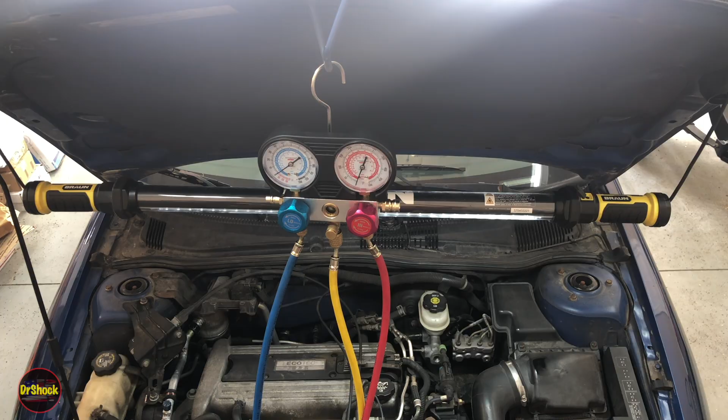All right guys, in today's video we're going to be working on this 2004 Chevrolet Cavalier again. It's got an AC performance problem. The AC system is working, but we're not getting the kind of cooling out of it that we would expect. The owner is complaining that it's not as cold as it was in the previous summer season. We repaired a leak on this previously on the AC compressor hose, the primary hose, and I'll put a link to that up here. But now that the leaks are fixed and it's holding the proper refrigerant charge, it's still not where it needs to be. So what are we going to do in this video?

I'm going to show you how to use a gauge set and some simple tests to determine where in the system we're getting this failure in performance.

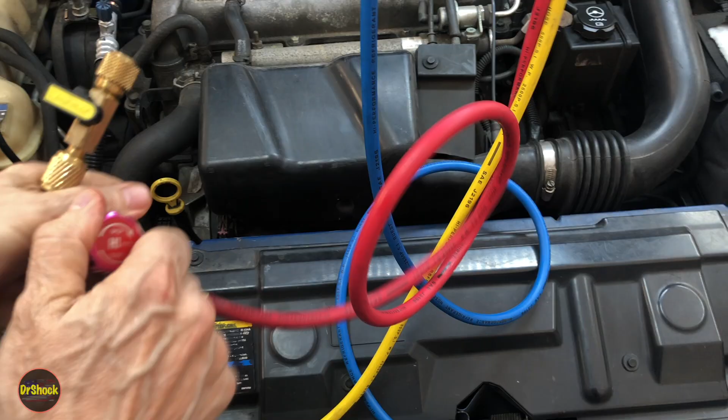So the first thing we're going to be doing is making sure that the gauge set valves that control the service valve couplers are closed, making sure the manifold valves are closed, and we're going to take the charge hose and hook it up to a vacuum pump.

The reason we're doing this is we've got to take the moisture out of these lines before we hook them up to the actual vehicle system. As we open this up, it'll suck all the air out of this hose and this hose. We want to do that because we don't want any atmospheric contamination getting into the system when we use this.

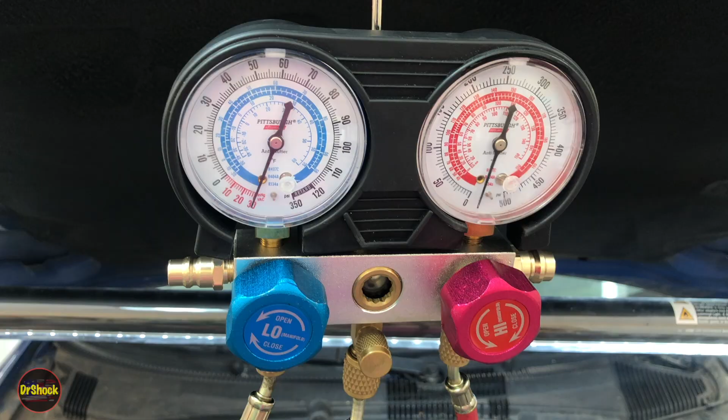So at this point, this hose is under a vacuum. We can disconnect it from the vacuum pump, as long as you've got a valve on the end of your charge hose, and as long as we keep this closed up, we've got this vacuum. So now what we can do is set these up on the actual vehicle.

So on this particular vehicle with this blue cap, this is the low side coupler. We're not going to open them just yet, we're just going to get them in position.

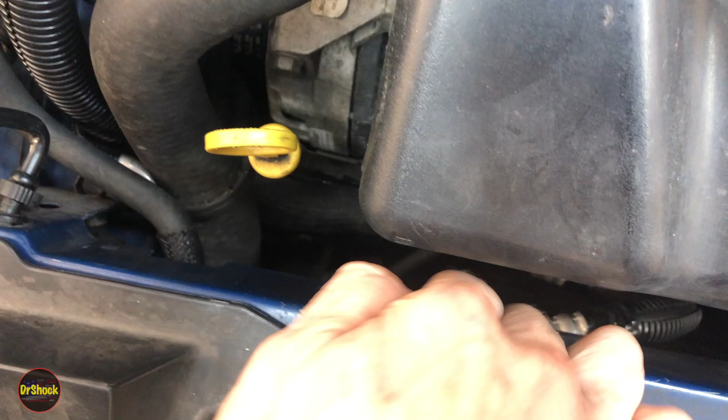Now this vehicle coverage applies to 2002 to 2005 Chevrolet Cavalier and Pontiac Sunfire. It's really hard to see, so let me get the camera in another position here, but the high side valve is actually under this metal cross member. All right guys, this is a better view hopefully.

So you see here's the red cap for that high side connector. I'm going to block your view just getting the cap off. There's no way I'm going to show contorting around to get the coupler on there, but that's the service fitting you've got to get the coupler onto.

All right, so we've got that on there. It's a real pain to get on there, particularly if the engine's been driven like this one where this is all hot under here, but it can be done, and that's what has to be done.

All right guys, from the inside we're going to start the engine up, put the AC on, put the fan on. We're going to leave it with the center vents because I want to concentrate the airflow up here, and then we're going to insert a thermometer in the left center vent.

Right now you can see the reading looks like just a little bit above 80 degrees. We're going to give it a couple of minutes, and then we're going to go under the hood and open up the service valves for the gauges.

All right, again with these two valves remaining closed, we're going to come down here and open up these valves, starting with the low side first. Just 2 or 3 fingers, you don't want to crank down on it. As soon as you get some resistance, you're done.

All right, so we're reading just under 50. I'm going to go reach my hand under the front here and do the same thing with this high side valve, and you guys can watch up there.

So we're reading what looks like around 49 on the low side, and maybe around 175 on the high side, maybe around 170. We're just going to let this stabilize for about 5 minutes, and then we're going to come back and record these two values.

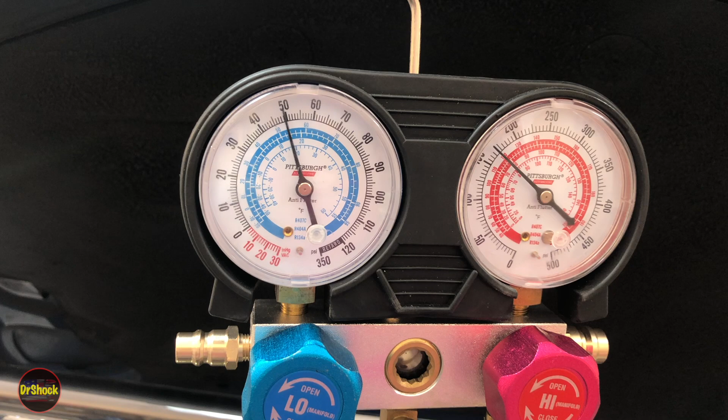Alright guys, it's been 5 minutes, and what we can see here on the PSI portion of the gauge, we're sitting just right at 50 PSI. So this is really too high for the low side. And then on the high side, using the PSI portion of the ring on the gauge, we are sitting just shy of 175, so I would probably call it 170.

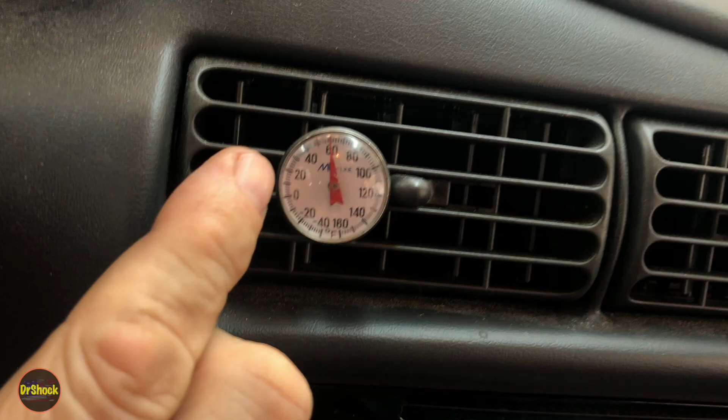So now we're going to go inside the vehicle and check the temperature we had inside. On the inside, we're reading what looks like 60 degrees, at best 59. Let's give it the benefit of the doubt and say it's 59. So we're going to write that number down here.

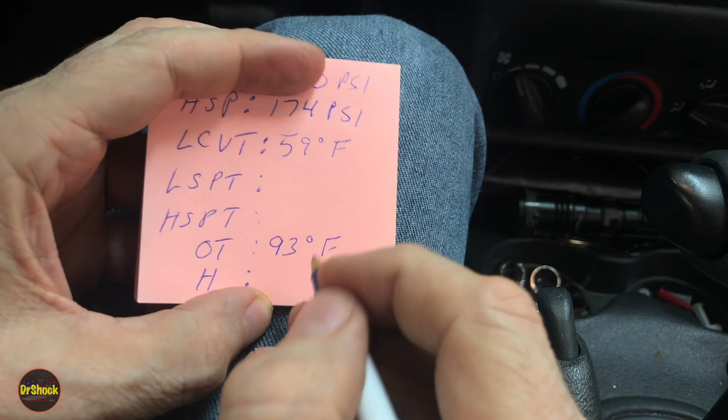So if we take a look at what we're writing down, we've got 59 degrees on the left center vent temperature. Our low side pressure was 50 psi. Our high side pressure was 174 psi. Some other things we can write down: the outside temperature currently is 93 degrees Fahrenheit, so these are all Fahrenheit measurements. And the outside humidity right now is 52%.

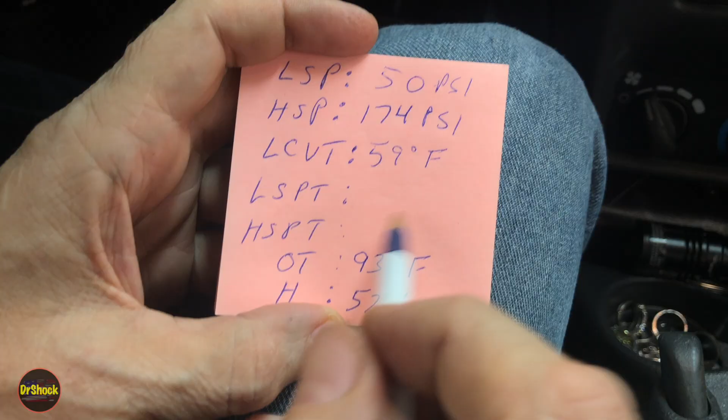We're going to need all of this information. We've got two more pieces of information we need to go get under the hood: the low side pipe temperature and the high side pipe temperature. This is a subjective measurement with your hand. So what we're going to do is shut everything down, feel those pipes, and determine if they feel hot, warm, cool, or cold, and jot down what that is. We're going to feed all of this into a service manual troubleshooting procedure. At this point, we're going to shut everything down, and within a minute or so, we want to go in and complete this next step.

So let's go back under the hood. All right, let's look at the gauges first. As we walk back in with the engine shut off, the pressures are going to start to equalize between the low and the high side. So we see the low creeping up, and we see the high coming down. So we want to see that happen, so that's a good thing. Eventually we should be reading about the same.

So now we're going to make this subjective measurement on the low side pipe. If I grab this pipe, it definitely feels cool, somewhere between cool and cold. It's obviously not too cold to touch, so I'm going to call that cool. And on the high side pipe, I'm just going to reach under here. This is usually hot, so be careful when you reach under here, and this is no exception. This pipe is definitely hot.

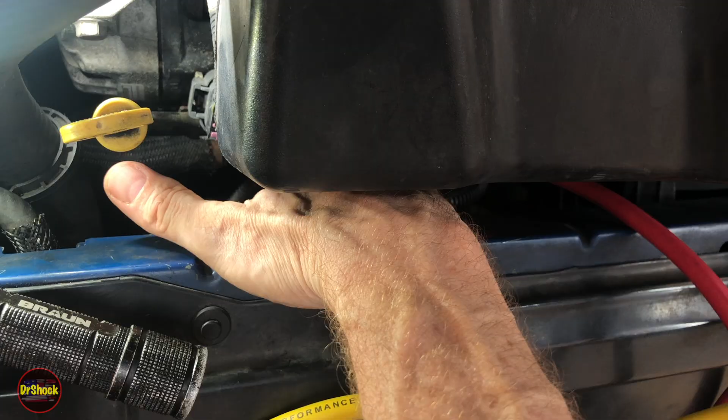All right, so at this point, all we want to see is does this eventually equalize? And I think it has. We're reading about 79 psi on the low side. These are roughly in 5 psi ticks, so 95, 90, 85. They're very close, so I'd say we're reading 85 psi on the high side and about 79-ish or so on the low side. So I think this is going to equalize if we give it more time.

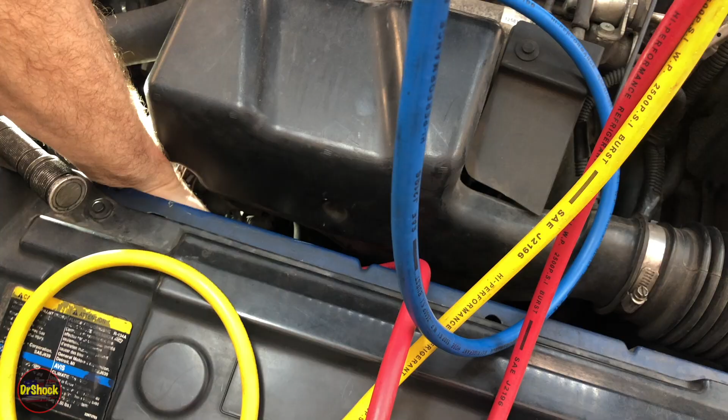So the next thing we're going to do is close off the high side service port down here. I won't be able to show you that because of the cramped corners, but you guys know what we're talking about. We're going to close this off, and hopefully we can get this with one hand here. We're going to remove this pipe, this coupler.

All right, so with that closed, this line is holding pressure. We're going to go ahead and open this valve to let that pressure into the manifold. We've got a lot more refrigerant sitting in this high side from what we did in our testing. We're going to start the engine back up, and we're going to suck some of this out into the low side before we go to the service manual.

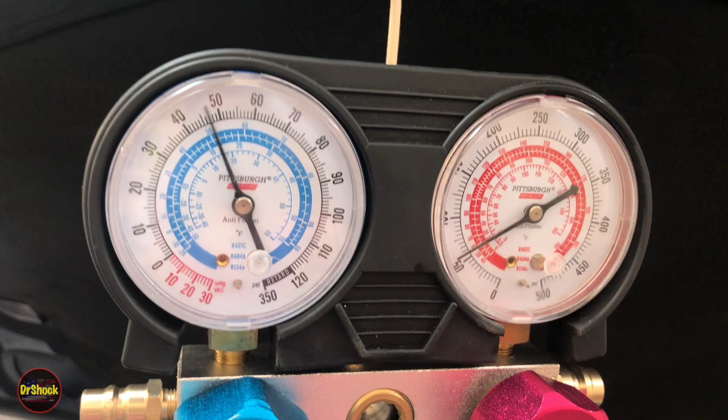All right, with the engine started again, our low side is going to slowly creep back up. We've left this the way we had it, so it's still open. All we're going to do is slowly open this valve to try to suck some of this pressure out. You see that's going down. Open that up all the way, and then we can close it.

Now we're done. All right, and with the engine shut off again, we can reclose the low side service port, remove it from the vehicle line. Let's go ahead and take a look at the service manual.

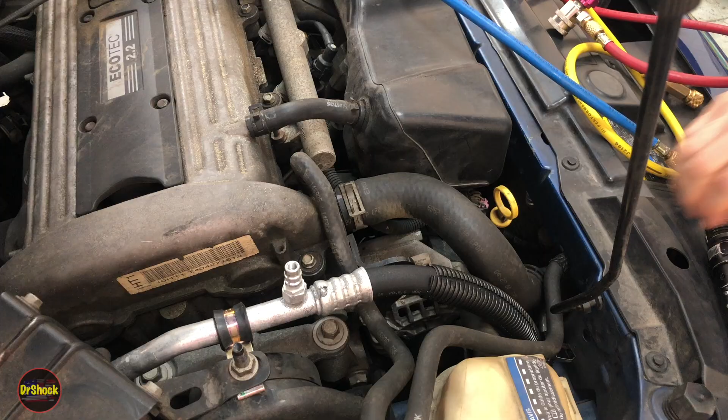All right guys, I'm just letting out the residual refrigerant that's trapped in the line from that exercise we did before, so that we're all back to zero and can stow this, because we're not going to need it for the next step. We're going to use a different machine.

Taking a look at the service manual, going over to this section, they're going to talk about the system performance test. We've done this, but I'll show you these steps. They have a dedicated machine that plugs in and does the temperature and pressure analysis, but we've done this with separate aftermarket tools.

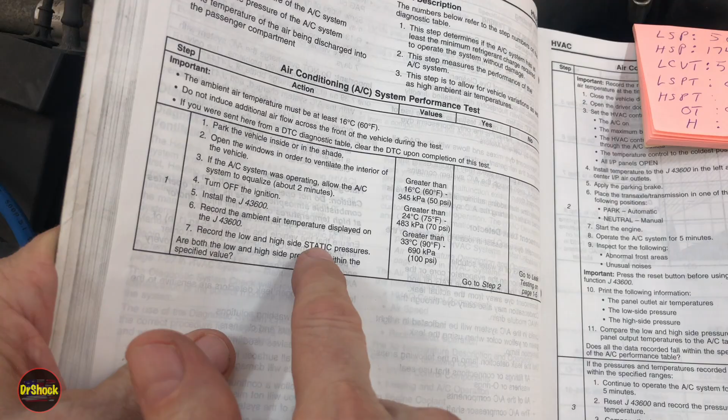They basically tell you to capture the ambient air temperature, which we did, and record the high and low side pressure. They're talking about the static pressure, without the engine running, but we went straight to the next step with the engine running. Then they ask you to look at what you're getting, and if it's not matching the values, they tell you to go to the next step.

The next step is to get the AC turned on, temperature set to the coldest position, blowing through the front vents, install the temperature sensor into the center IP outlets, then start the engine and operate it for 5 minutes. That's what we've done.

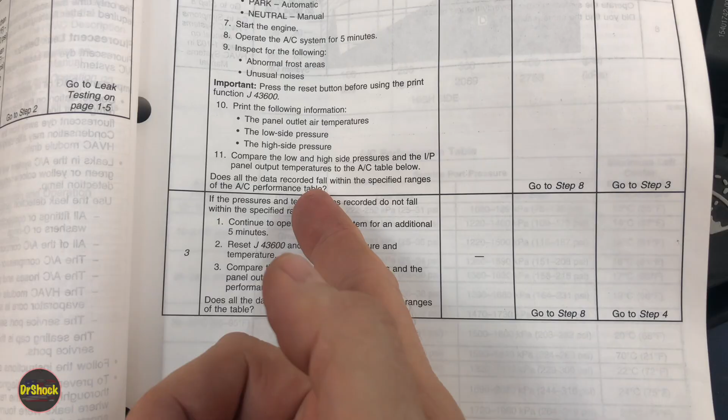They ask if it fell in the ranges specified in the performance table—I'll show you that in a minute. In our case, it's no. They tell you to run it again, reset the temperatures, compare it again, and if it still fails, go into diagnostics, which has a bunch of different tables. I'm going to show you a shortcut straight to this performance table.

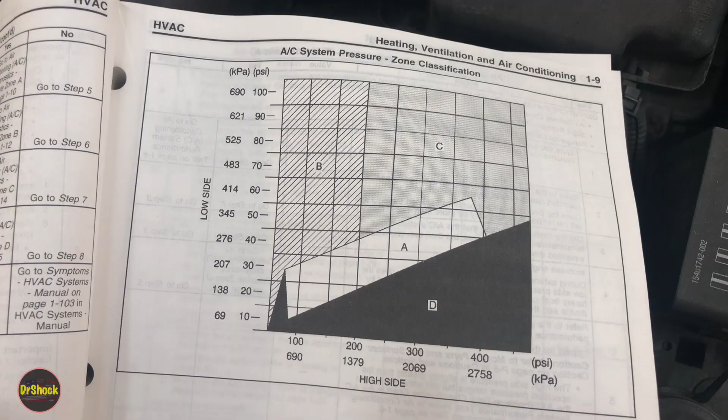Every GM vehicle has something like this in the service manual, but it's not always the same. For this particular vehicle, our outside temperature was 93 degrees and our humidity was 52%. We come down at the ambient air temperature, find 93 degrees Fahrenheit—that's this row—greater than 30% relative humidity—that's this row. We should be reading between 30 and 41 psi on this vehicle.

This video data is only for the vehicle in the video title and description. Our high side should be 203 to 282. So we're definitely reading too high here and too low there.

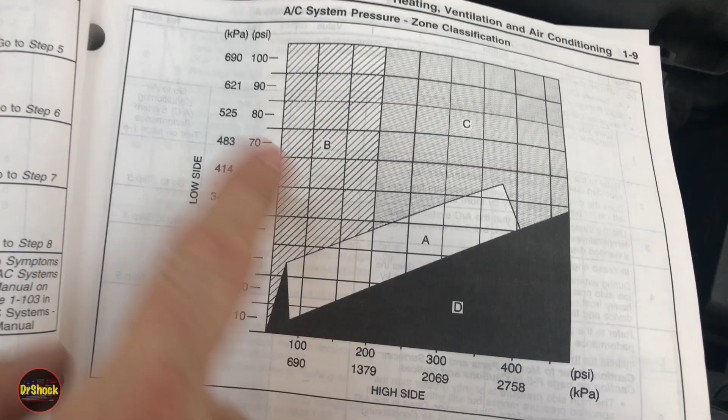Where that puts us on the diagnostic table is that all these different temperatures correspond to letter codes that tell you where the diagnosis is. If the low side is about 50 psi and the high side is about 174, that puts us squarely in this B zone.

If we take a look at the B zone diagnostics—this is A, this is B—it asks, were you sent here from the performance test? Yes.

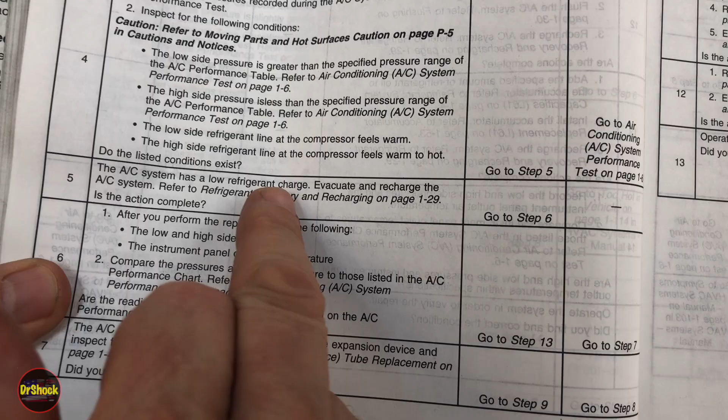Now I'm going to show you two different ways for this, because we did another video I talked about. It asks, did the pressures equalize or become static? I showed you that they do. So they'd tell you to go to step 5, which says the most common cause for that is a low refrigerant charge—they want you to evacuate, recharge the system, and check for leaks.

We already did that as part of the previous video. We'd go straight down to step 6, which says to read these pressures, take the air temperature, and compare that to the performance chart. If it's still not in compliance, go straight to step 7 and replace the AC compressor.

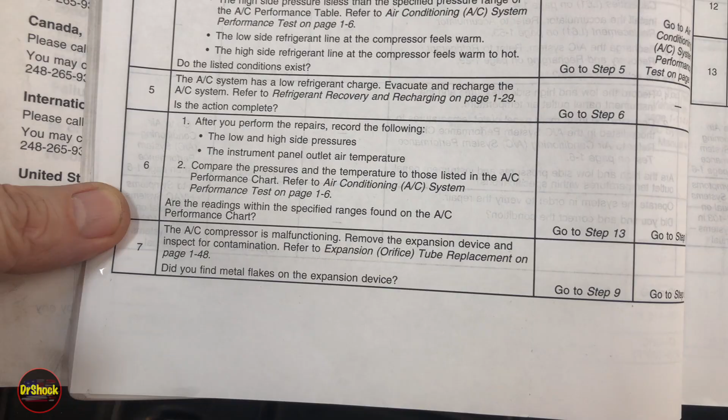As part of that, they want you to look at the orifice tube first, and then there's a number of steps because you may have to replace the orifice tube as well. With GM, it's not an automatic parts cannon where you just replace everything—you only replace the part that's failed, and you do tests to determine if other parts need to be replaced with it.

Let's say we didn't have that previous repair and we went through it and did this recharge—that would have caused us to go down this other leg of the tree on step 3. I'm just showing you both flavors of it.

They would say, is the low side pressure equal to or greater than the range in the table? In our case, it's greater. Is the high side less than what's in the table? In our case, it is.

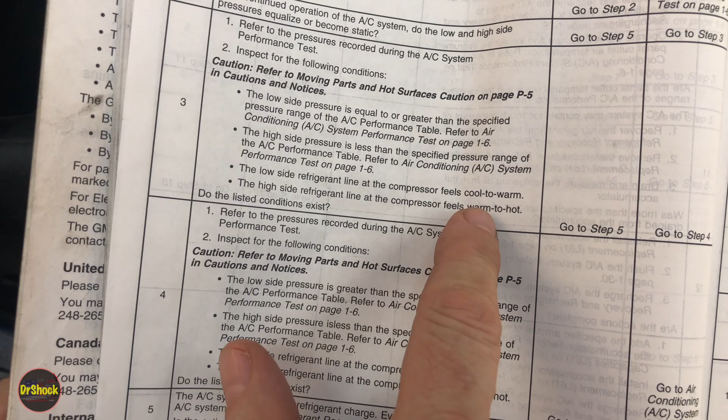Then, how does it feel—is the low side cool to warm, and is the high side warm to hot? In our case, we said yes to all of these, and it would again suspect a refrigerant charge problem, taking us down to step 5 again. So we'd end up again on this path that puts us down to the compressor.

So no matter how you answer that first question, you get to it's a compressor problem, given that we have these pressures, as long as we've eliminated the refrigerant as a cause, and we have in this particular vehicle's case. All right, so if we continue on, it wants you to remove the orifice tube, and they want you to start doing some questions.

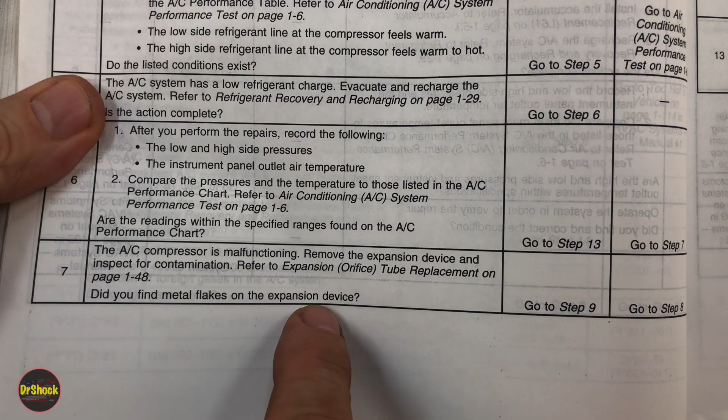They're going to say, did you see some metal flakes on the orifice tube? When they say expansion device, they mean orifice tube here, as you see up there. And if you said no, then they would take you to the next step, and they would say, do you see any brown powdery residue? And if you said yes, they would say, well then you need to flush the system out before you replace the compressor, and then also replace the accumulator. If you said no, then they would jump you down here and say, all right, you don't need to flush the system and you don't need to replace the accumulator, just replace the compressor. So depending on what that orifice tube looks like is going to dictate whether our repair is just the compressor or more than the compressor.

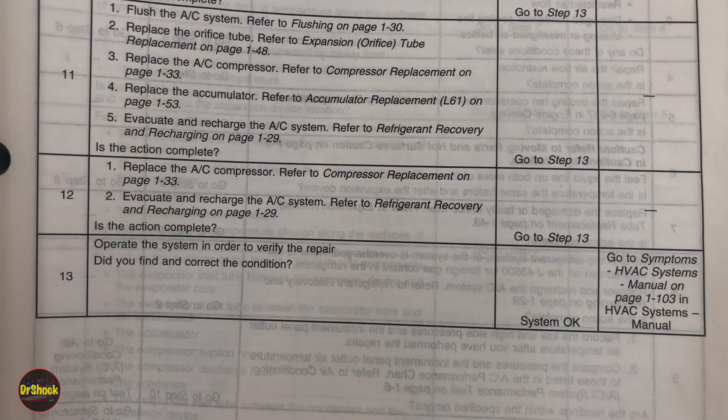So let's take a look at what's involved with removing that orifice tube. So I dog-eared that page back here. So, orifice tube replacement. And all of this presumes that you understand that you have to evacuate the refrigerant first.

You've got to evacuate the refrigerant. You can't start removing fasteners and taking things apart while it's full of refrigerant. That can be dangerous. You could end up with frostbite, cause blindness if it gets in your eyes, and also it's against the law, right? So there's a whole bunch of reasons you've got to evacuate.

And I'll show you evacuating the refrigerant here briefly with the machine. But when we get it evacuated, we're going to go after this disassembly here to take a look at this little guy. It's in there. He's plastic. He looks like this, and we're going to do those inspections.

All right, folks, we've got the recovery set up. Just like with the gauge set, we're going to have to vacuum the atmospheric air moisture out of these lines and the equipment before we use it to recover the R134A refrigerant. This is our filter dryer unit that does the separation of oil as well as filter and recover the actual refrigerant from the vehicle, and that is pulled through the recovery machine that's sitting here on the ground.

Everything I use is a brand of equipment from a company called Mastercool. There's lots of different brands out there. I like this brand. And then that goes over into our recovery cylinder, where the scale is located for weighing how much refrigerant we recover. And then finally, we've got our vacuum line going to the actual vacuum pump. We're just going to let this run for about 15 minutes, then we're going to get started.

All right, so after you run the vacuum for that much time, you're going to check that the gauges are showing a vacuum. In my case, I've got two sets. I've got one on this device here, and then we've got the gauges on the actual recovery system also showing a vacuum. And what we're going to want to see is we're going to want to wait 15 minutes or so. We want to make sure there's no leaks, because if we got leaks in this cabling that we have, we're going to have leaks trying to recover the refrigerant.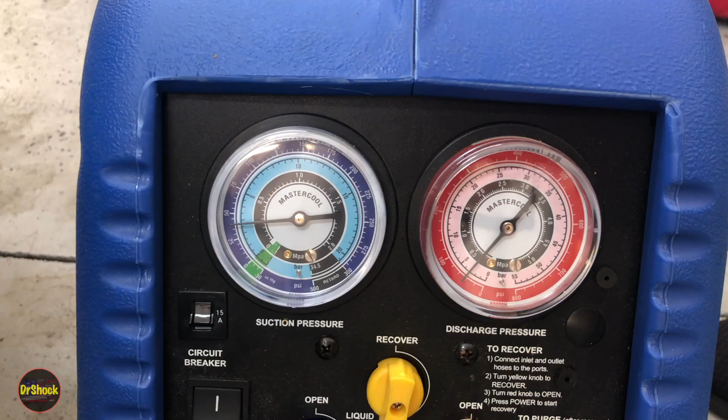All right, guys, we've started the refrigerant recovery process. We've got the recovery machine on the floor running, and it's going to charge up the cylinder through the low side port, and we'll be able to track that progress using the scale. So it doesn't take too long. We'll come back here when she's all done.

All right, guys, we finished recovering our refrigerant charge. At this point, I've hooked the vacuum back up to this setup. We're just vacuuming out the very, very small amount of residual refrigerant that these recovery machines are not able to access. And we're getting that out of the lines and out of the equipment as well as out of the vehicle system before we open it up to inspect that orifice tube.

All right, we've got our equipment out of the way. We've got a vacuum on the system. Now we need to go after the orifice tube for that last inspection before we make the repair. So we want to take note of this line that's running along the front of the surge tank right here. And if you follow this line over, that's where you'll find where the orifice tube is at, right? So not really a good spot for me to put this light, but right down here where the end of that tube is. So we've got this tube right here where my finger is.

Right there. So right under my fingers where the orifice tube is, if we pull out, it's once again in an inconvenient location, just like the high side port.

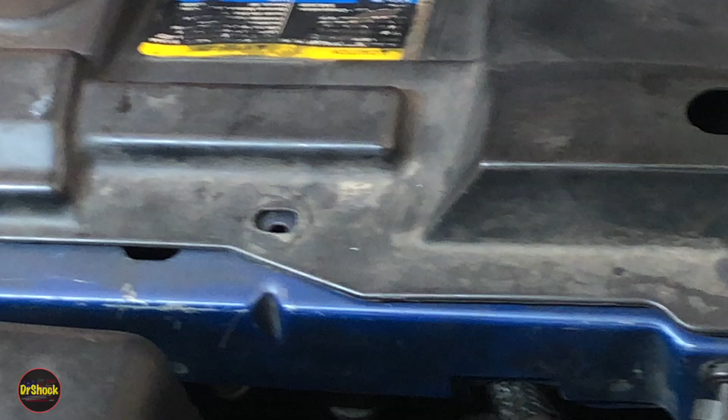To get some access, we're going to remove this panel cover here. There's several of these push pin type retainers. Pull up the middle, then we can pull up the rest of it. And if we pull these out real quick, last one's right over here by the battery. Then it loops under the fender on both sides, and then it just comes out. That's one thing we have to get out of the way in order to get in here.

And then the next thing we're going to have to do is grab a socket. We're going to have to pull this headlight out. That'll let us get access to this orifice tube. Now the service manual recommends you pull the surge tank, pull these lines, drain the coolant, and remove this whole access line that I was showing you, but I'm going to show you the shortcut where you come in from where the headlight is. It's a 13 millimeter, so we'll pull both of these passenger side headlight fasteners out.

And with these out of the way, this guy's just held in with like a spring retainer. We'll go ahead and get the wiring harness released right here. Get this side marker harness with this bulb. Give this a squeeze, twist this with this turn signal bulb, and just gently let them sit down here so they don't get damaged.

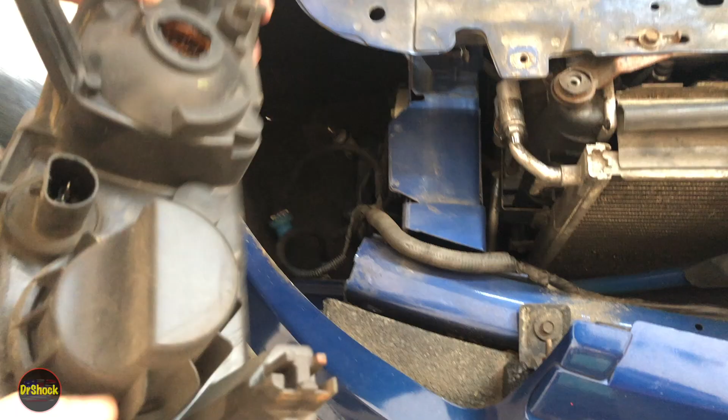This spring I was referring to is normally held onto here. Looks like it did not come off with the unit. Should have stayed on like that. Not sure why it didn't go. So what we'll do is we'll give it a pinch with a pair of pliers to get it to hold on better. All right, let me go do that and we'll come back and continue.

All right, with the headlight out of the way, there's what we're after. Just going to kind of clean off any dust and sand and dirt and crap that might be on it, because we don't want anything to fall in when we separate these pieces.

All right, so that's a 13 on the top. So we come in here with this breaker bar here. Just release the clamping force. This will probably be the easy part. Getting it separated will be the hard part.

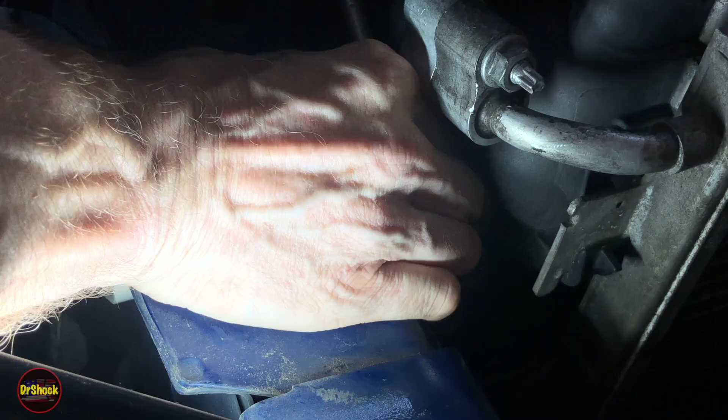Just a little bit of corrosion on this stud that's going to fight us near the end. I don't like to use penetrating oil on these air conditioning fittings, so you don't want to get any of that to ooze into the system. All right, so this is coming off. Now we just need to get this to separate.

So she is turning. If I can get myself situated to pull up on this pipe. All right, there it goes. And you heard the vacuum. And there's our orifice tube.

But we don't have enough clearance to pull this out. So let's see, what do we need to move out of the way back here? I'm hoping that we can avoid pulling the surge tank and draining the coolant for this. There's nothing holding this line, it's rubbing up against the AC compressor. We can move this up a little bit. I think we can make this work.

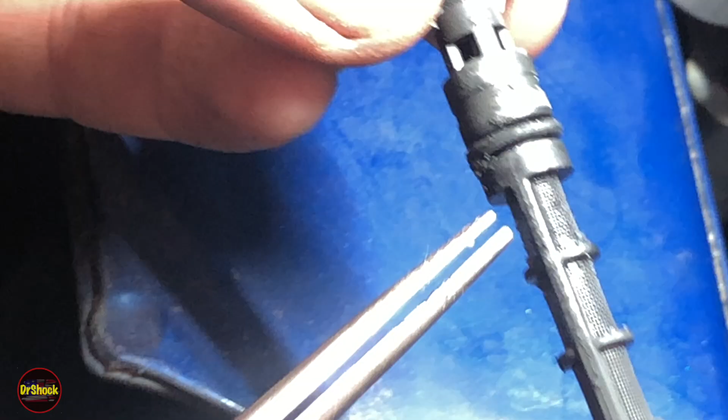There we go. All right, so what do we see? Well, we don't see brown. What we see is like a fine black powder, and then you see up here we have some metallic particles.

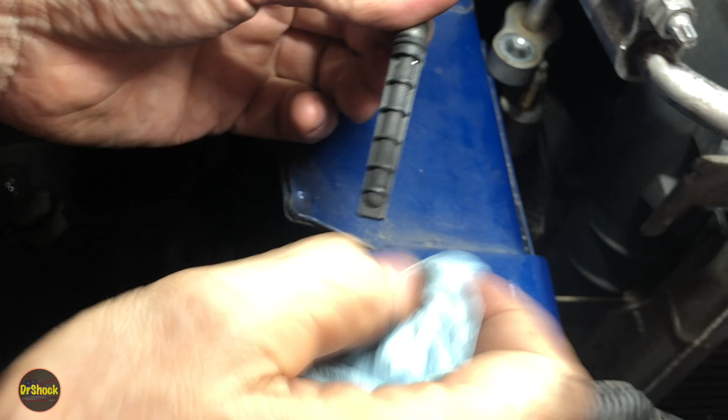And so this is wear of the compressor. So what I'm looking for is if we have any brown as well. Like I showed you in the service manual, if we can find a reasonably clean part of our rag here. We're not going to reuse this tube, so it really doesn't matter. I want to see, is it always black or is there any brown? If there's no brown, then the accumulator is okay. What's the brown mean? It means that the desiccant material inside the accumulator has degraded or broken down. So this is all black along with some metallic pieces. All we have to do is replace this guy.

So let's go get a new one of these, and then just for grins, let me show you what I was referring to about the accumulator.

You guys should know this to be doing this kind of work, but if we follow this compressor pipe over, this big guy here is the accumulator. Inside is a desiccant material designed to remove minute amounts of moisture that might get into the system. It's also a reservoir for the PAG oil that lubricates the system.

So this guy's okay. The orifice tube's got to be replaced and the compressor's got to be replaced. So let's go get the new orifice tube. All right, let's put a paper towel over the opening to the condenser.

First thing I want to do is get the old O-ring off of this pipe. You guys can see underneath here. Just want to do it really gently so that nothing scratches. You got to replace the seals.

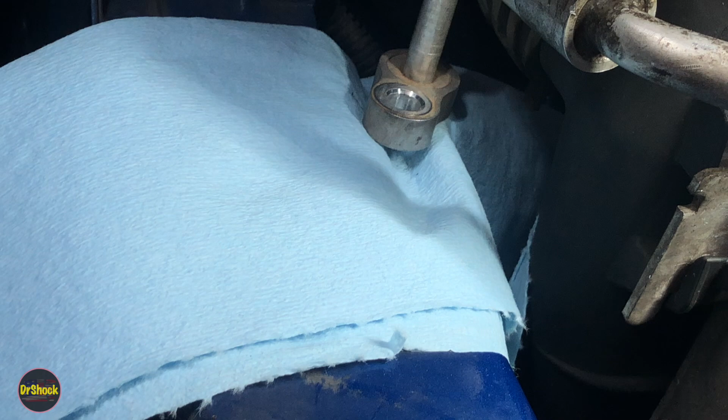All right, and then we're going to clean up anything that might be on this pipe. There's some residual old material from this 20-year-old seal on here, so just knock some of that off. All right, and then we'll replace that seal. It's going to be an AC Delco 15397853 or a GM 5245 6067.

Like a bag in a bag kind of deal. Just want to get one of these out of here. Come on. All right.

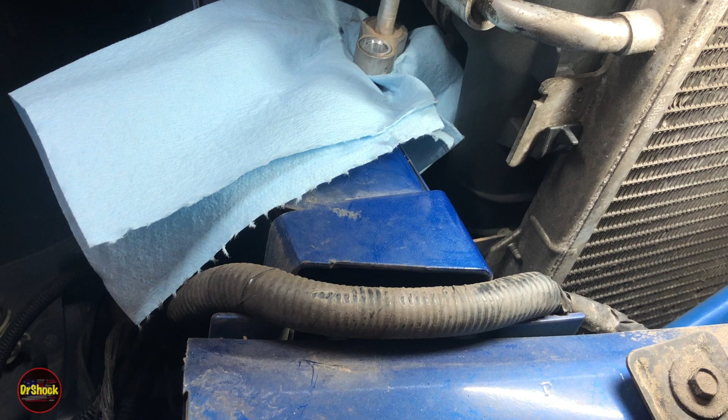And then we're going to be lubricating things with some AC Delco refrigerant oil. For R134A, this is AC Delco 15118, GM 12356151.

Just going to take a drop of this, just to help ease the assembly here, because this is not the best position for this to be in. I don't know how much you guys are going to be able to see, but we want to get this on without nicking it. So we got to kind of stretch it over this tube underneath. If we bring the camera more level, you can see it's got a little recess that it fits in. So we just want to get this rolled up into that recess like that, and we're good to go.

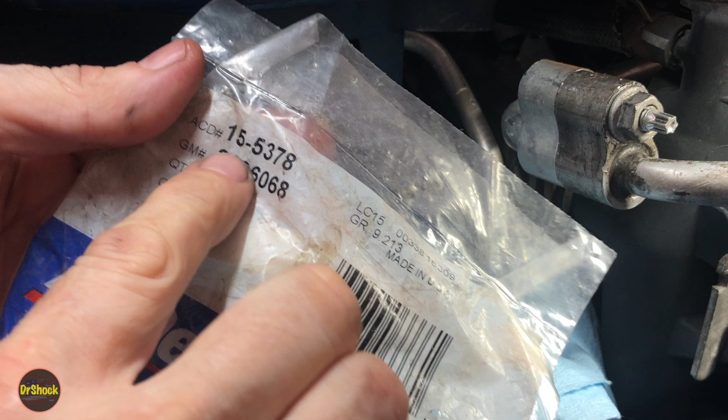All right, so next thing is the orifice tube. So we pull back a bit. We're going to replace that with an AC Delco 155378 or a GM 3096068. This is what they should look like.

So if we compare this with our original one, now you can't judge this plastic up here because they may have been black plastic originally. We're just looking at the screen portion. You can see how obstructed the screen is on the original one compared to this new one.

All right, just like we did with that seal, there's an O-ring seal right here built into the orifice tube. We need to give that a drop of PAG oil also to ease the assembly. You do not want to touch this screen, and you don't want to let it make contact with any of this dirty part of the vehicle.

So I'm trying to see the best way to get this in here without doing that. Just going to kind of get it lined up and just plop it in just like that. And then just going to tap it till it goes all the way. And then, as you see, it's got like a little plush shape to the top. And when we push the pipe down, it's going to push it more, so it's going to self-seat itself.

We just got to get the nipple to fit into the male part of the pipe to fit into the female part of the pipe. That's what we're dealing with right now. All right, get the nut that we had on here.

And we're going to tighten this down to 12 foot-pounds. Oops, where's our socket? Not going to get very far without a socket. Let's go ahead and do this to get it started.

We got this radiator pipe right in the way. But by putting that PAG oil on here, everything will lube up and seat in very nicely.

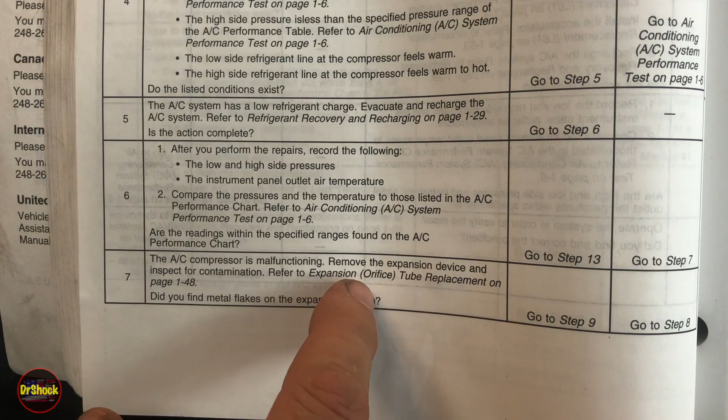Right, so it had already dropped us into this section about the compressor malfunctioning, but they want us to inspect the orifice tube and see if we had metal flakes on the filter. This is the yes column and this is the no column. In our case, it's a yes.

We went ahead and also inspected just in case it was a no, to show you both legs of the tree. If we said we didn't have those metal flakes, it would have taken us to step 8 and asked, do you see any brown powdery residue? If we said yes, it would have dropped us down to flush the AC system, replace the orifice tube, and still replace the compressor, but also replace the accumulator.

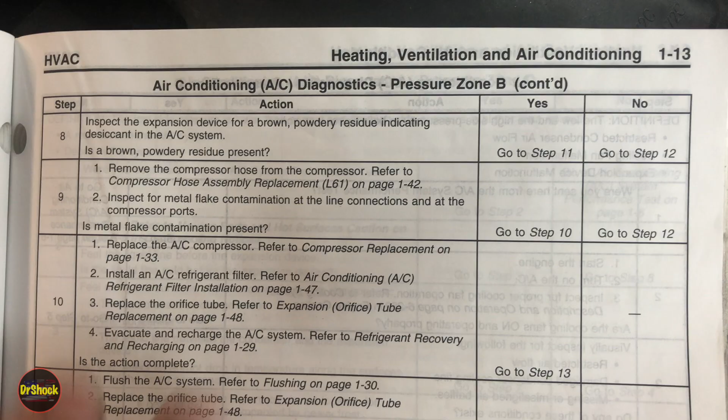So we didn't have this. Basically where we left off is we took just metal flakes, yes, so we jumped to step 9, and then removed the compressor hose. Now the video I linked for you above earlier was us already doing this compressor hose, and I still have the old one, and there are no metal flakes inside the old hose. So the only ones we have are on the filter. So what do you do in that situation?

Well, if we say no, it drops us down to step 12: replace the compressor, evacuate and recharge the system, and you're done. You're going to go back and re-verify that everything's normal.

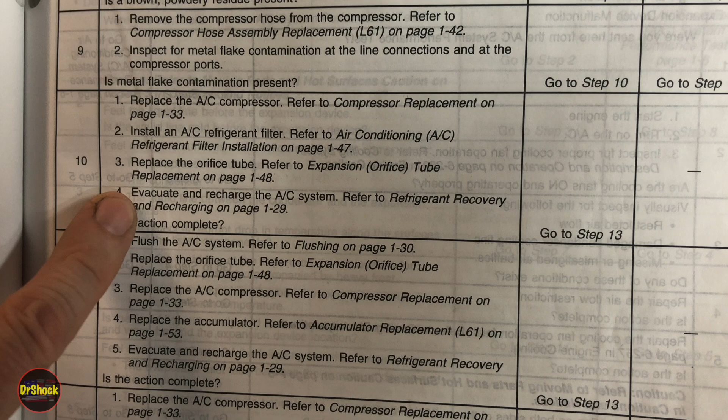If we had found metal flakes in that compressor hose, we would have gone down to 10, still replaced the compressor. They would have recommended installing an AC refrigerant filter because those metal pieces could potentially have circulated around to the condenser or the evaporator. We still would have replaced the orifice tube, and then evacuated and recharged the system. So notice we would not replace the accumulator in this particular failure scenario.

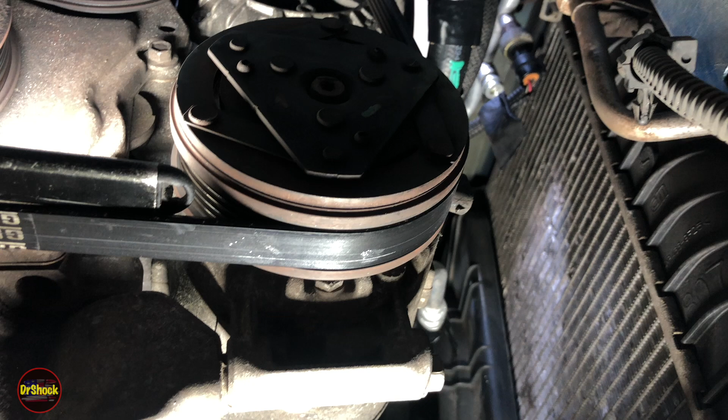So we're going to have to remove that bolt and these 3, but the first thing we're going to do next is get the tension on the belt. You're going to need a tool to get the tensioner right up here. Just going to need to lift this guy up enough to get the belt off.

That's the main reason you got to get this piece of trim out of here, so you can get this tool we just used, so we can get this off out of the way. All right, let's get that out of the way now. So now we're going to take these 13s and loosen them up.

One thing I noticed on this compressor is this is the original compressor from 2004. I am very amazed. So this thing made 21 years.

I'll release this one back here as well. All right, and then I'm going to have to get this other one with an extension. I'll get that, and then we'll come back and we'll pull this compressor hose.

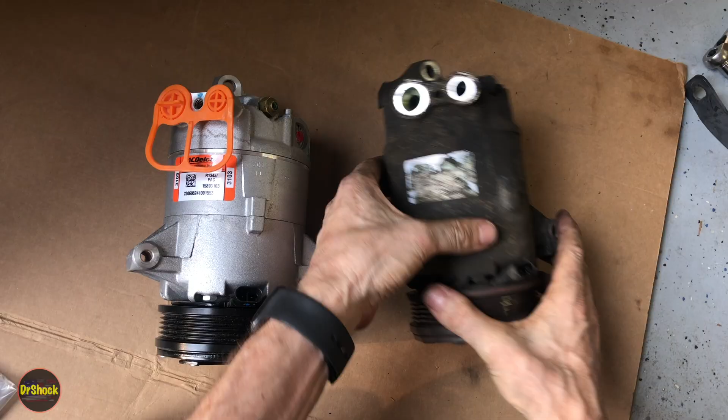All right, here's our side-by-side comparison, new and old. Looks like our original one that made it 21 years was made in Brazil, so hats off to the GM team in Brazil from 2004. The replacement is made in Mexico, and it's a 1589-3103. I'll put a link to this in the description along with the AC Delco number.

And in the directions that it comes with, we already unboxed this guy to save a little time. We're going to get 2 new seals, just like those old ones we took off the compressor hose, so we'll slide those on with some PAG oil. And then the instructions say I just want to see when it's sealed up like this, there should be a vacuum when you pull this off.

I already checked this off camera, so it was under a vacuum. That's a good sign, usually a sign that there's oil in it. But it says here that they want you to drain the oil from the old compressor into a calibrated measuring container. This is pretty typical for GM procedures. Drain it from both the rear head port and from the crankcase drain bolt hole.

So they mean draining it from here where the hose connects, and then on the back there is a drain plug. It's so covered with crud it's hard for me to see it. To get some of this cleaned up, I think it might be this guy right here. I'm not sure, I have to go look at the service manual and confirm which of those on the back is the drain plug on this particular model compressor.

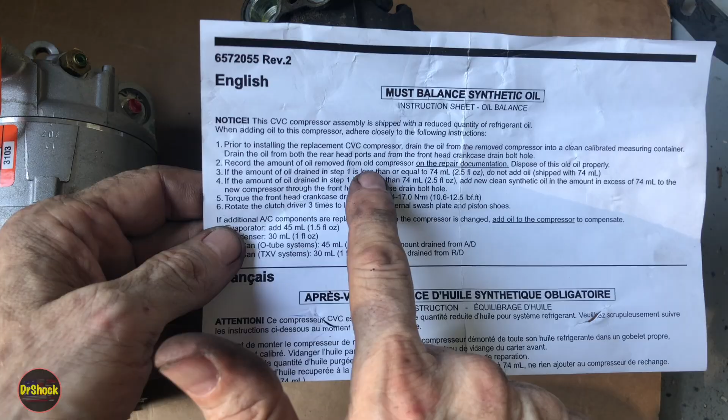Record the amount of oil removed from the old compressor. You can just throw this out with motor oil as far as recycling it. And they just want you to know if the amount you got out of the old compressor is less than or equal to 2.5 ounces, then you don't need to add any additional oil to the new compressor.

If the amount of oil is greater than 2.5 ounces, then add enough PAG oil in the amount that it exceeded. So let's say you drained 3.5 from the old compressor, then you would add 1 to the new compressor. And I would tell you we actually will add that new oil in the form of dye if we have to go that route.

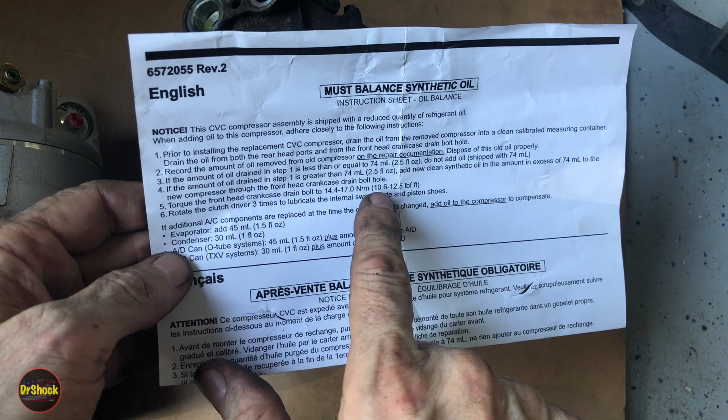Torque the drain bolt. So if you took the drain bolt off for whatever reason, you would torque it down to up to 12.5 foot-pounds. Rotate the clutch to lubricate the swash plate and the piston shoes. What they're talking about is before you install this guy, any oil you add, they just want you to turn this around several times to get the oil all lubricated in.

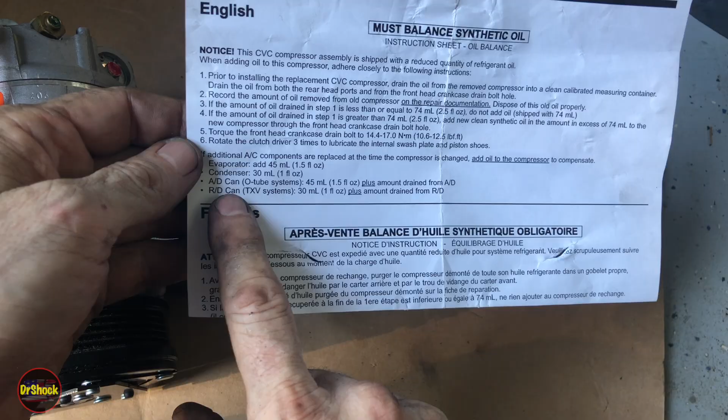It's been sitting in the box for who knows how long. And then they're telling you if you replace any additional components, add the additional oil to the compressor to compensate. So if you replace the evaporator, add 1.5 ounces. If you replace the condenser, add 1. Let's see, orifice tube systems, 1.5 ounces plus. So we didn't have any of this, we didn't replace any of these things, so we're just going to go with what's in the compressor.

All right, let me get something to measure this, and we'll drain the old compressor oil out and see what we got. All right guys, this is what I use for these kind of jobs, it's just a graduated cylinder with a little funnel on top. So we're going to drain out what's in this old guy first. I already wiped around the edge to try and avoid some of the debris falling out of here.

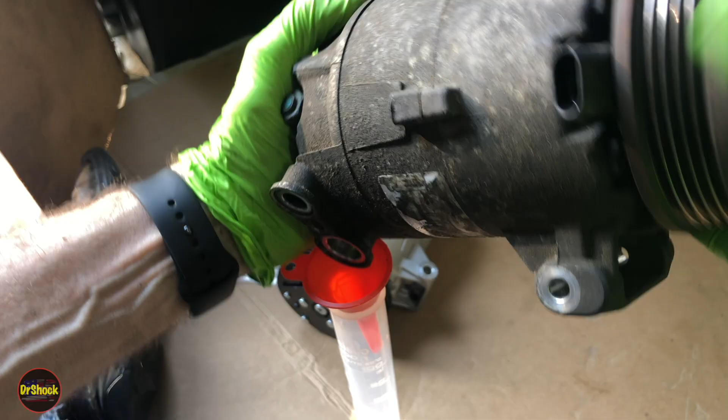I would expect to get something out of here. It's possible the system lost some oil in that leak we fixed in the previous video, and that could have been what finished off our little 21-year-old compressor. Let's go ahead and check the drain plug, right here on the bottom of this model, 13 millimeter.

Let's see if we get anything out of that. Yeah, we got something out of that. Turn this thing around. So that's encouraging that it wasn't completely empty.

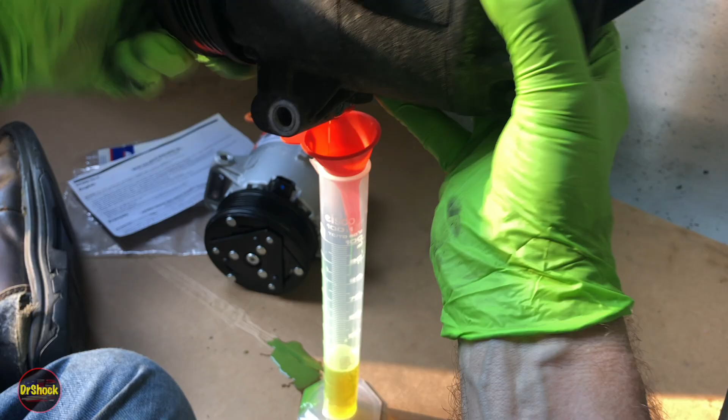Whoa, lost some. We're going to have to quickly estimate how much that spillage was. That's unfortunate. And yes, this guy's going to be heavy for this process. Just going to move it around a little bit. All right, let's set this like this.

Let me get a tool to scoop up the spillage, and then we'll see if we got anything left in here. Honestly, I don't think we got more than a little drizzle here, not even enough that I can measure, just a few drops.

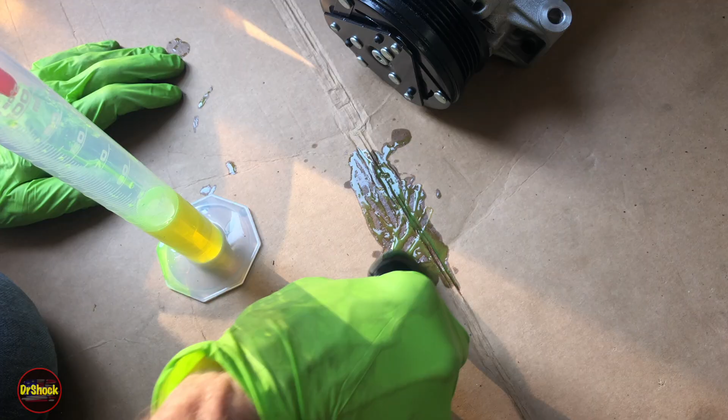So we're going to estimate that we've got just a fraction of a notch on the cylinder here with what accidentally spilled when we tilted that guy. All right, sorry about that, guys. A little bit down here as well, just drops here and there.

All right, so what do we got here? So we've got, in milliliters, looks like about 32 milliliters. That's what I'm going to say we had in here. So let's see if we got any more. We might just call it 33 with the spillage.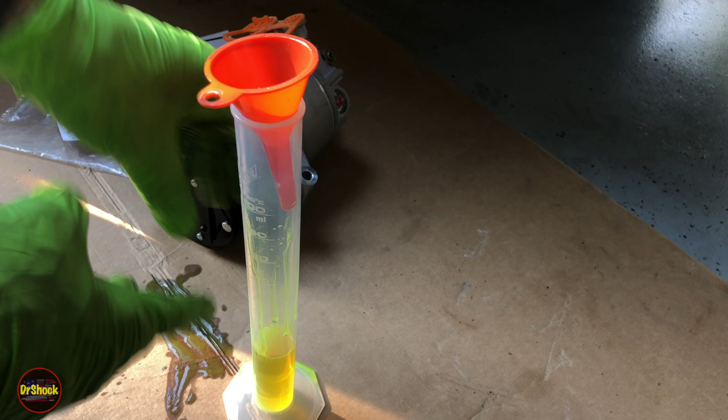Let's see if we get anything else out of here. Tilt it like this, tilt it like this, rotate it. Nope, she's empty—well, a little tiny drizzle came out there. So we'll go like this, we'll go like that, just get a few extra drops.

What does that put us up to? 33, so we'd call that 34. If we look at the directions, they told us there's 74 milliliters in there. So we have less than 74, so we're done. We don't add anything; the only difference is I want to have dye in here like we've got now.

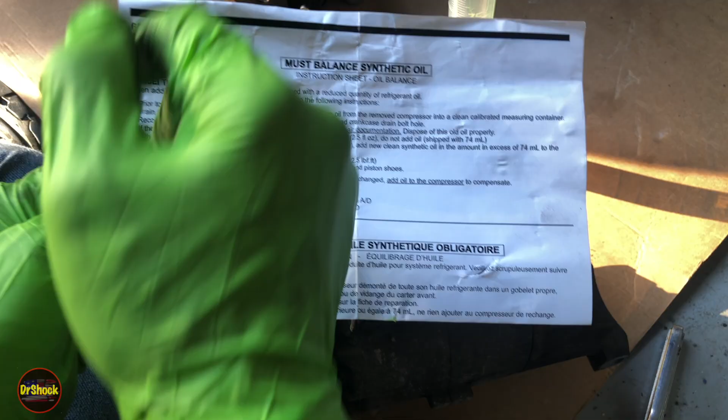So I am going to drain the new one out, and we're going to replace that with some dye. All right, guys, now let's focus on the new one. We know there's no way we need to worry about the old one having too much because we got 33, 34 milliliters tops—maybe there was another milliliter left in there. So we're not going to find the 74. So this guy here should have 74.

Take this plunger thing off that I was telling you about. You want to see if it feels wet—that's a good sign the oil is in there, and you want to see if it was under a vacuum. Now what I'm looking at here is the dye, and that tells me I'm done. I don't need to add any dye because I see it already in there, so that's great.

What I was about to add was this AC Delco tracer dye, AC Delco 15120, or GM 12346287. This is a quarter of an ounce, which is 7 milliliters. So we were going to take out about 7 milliliters and replace it with this, but since it's already got dye, we're done. So at this point, we're going to go back under the vehicle.

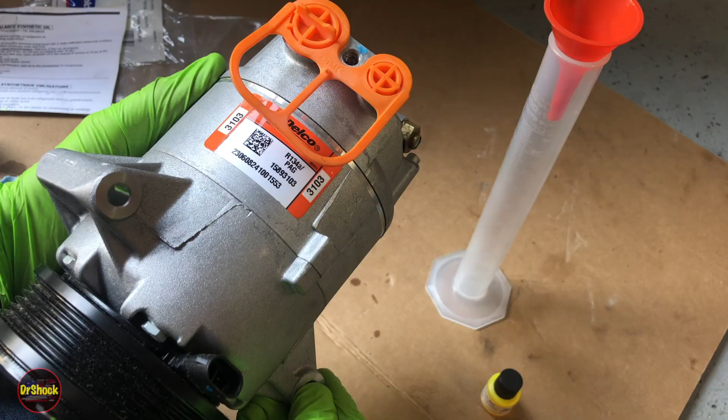We're going to mount this. Those three 13 millimeter mounting bolts are going to get torqued to 16 foot-pounds. We're going to snap the electrical connector back on, put the belt back on, and take that 13 millimeter that holds the compressor hose, torqued to 12 foot-pounds. And then, of course, we're going to put our new seals on that the compressor came with, and we'll be able to recharge the system.

So I'm not going to walk through all of this reassembly because it's just the reverse of the disassembly we already showed. Let me get part of this mounted, and I'll show you where we are at different steps as usual.

Okay, guys, we've got the new compressor installed. We've got those three long 13s torqued to 16 foot-pounds. From the service manual, we've got the short 13 that secures the compressor hose with the new seals torqued to 12 foot-pounds. We've got our electrical connector reinstalled, and our serpentine belt reinstalled on the pulley.

And you can hear in the background this time we're pulling a vacuum on the system yet again. We're going to pull it for 30 minutes, then monitor it for 30 minutes for leaks, and then we're going to recharge it.

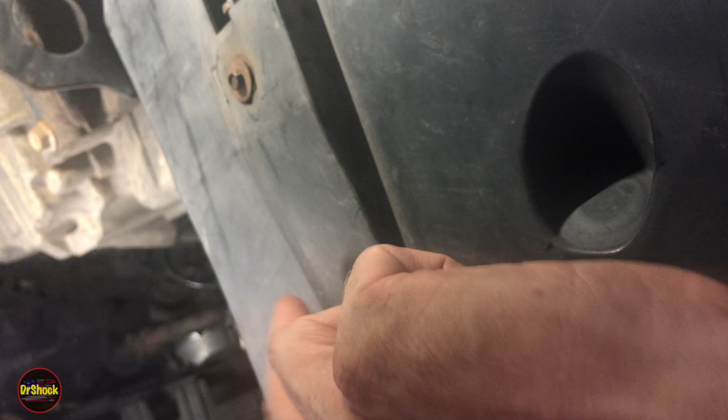All right, guys, we got this panel back in. These bolts that are all along the edge here are all 7 millimeter, and there's no specific torque value. These and the ones on the inside are all the same, along with the fir tree clips.

That's all you need to put back in to get this panel back in. At this point, we're doing our 30-minute wait on our vacuum to make sure we have no leaks. I'll give you a view of the gauges, and then we'll get it back down off the ramps and get ready to recharge it.

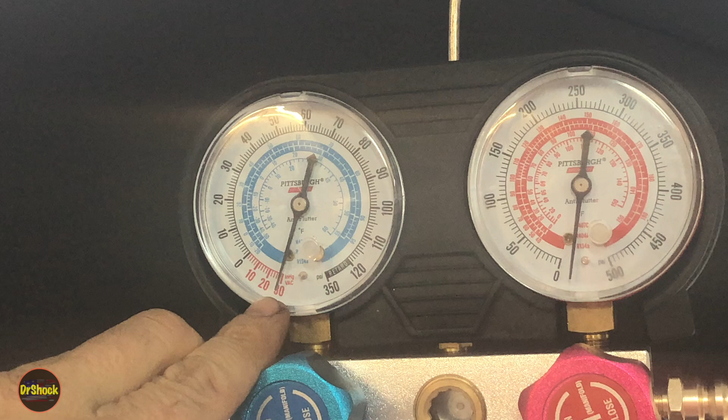If we zoom in here, we can see we're 15 minutes into our 30 minutes. We're still sitting at minus 30 inches of mercury on the vacuum, which is what we want. We want to see that still in the next 15 minutes with this valve closed and our service valves open on both the low side and the high side, and then we're ready to charge it and rerun the performance test. At 45 minutes, we're still holding that vacuum, so no apparent leaks.

Let's go ahead and get the recharge going. The way I do these recharges is I leave the gauge set on. We take the vacuum line, hook it up to a virgin tank. I don't like reusing the refrigerant, so I always use virgin. We're going to go ahead and open the main valve to the tank.

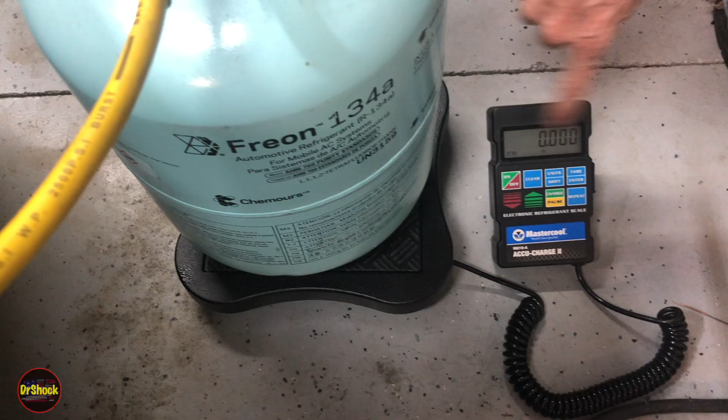We take a note that we've got our gauge zeroed out, and then as we open the valve to the charge line, see, as we push on it, it changes. What we're looking for is to use this to measure what's coming out. The vacuum will pull some amount of the refrigerant into the system all by itself.

When you come up on top here, you want to make sure that your high side manifold valve is closed, because we're going to be charging through the low side, and that the low side valve is open. So open and closed. Now we're going to go start the engine and let the new compressor pull the rest of this charge through.

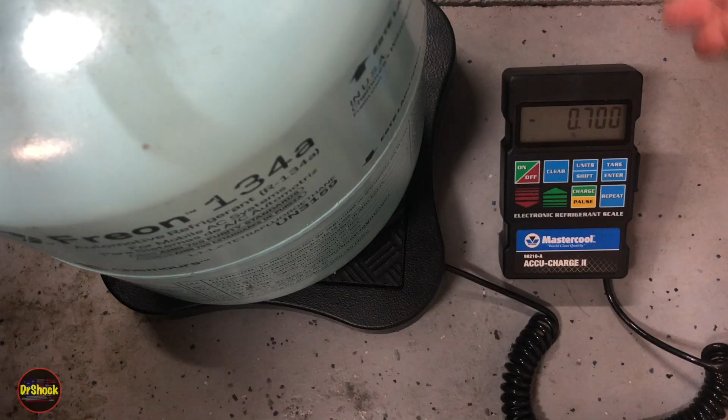It's going to take time to build up, but if we look at our scale over here, we can see that we're slowly sucking out the refrigerant. So 0.65, 0.7, and if we take a look over here on the vehicle, on this sticker on the front, we can see that the amount we want to get in here is 1.5 pounds.

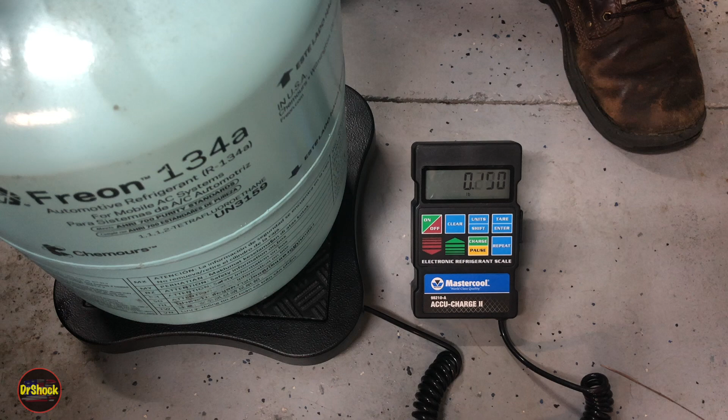We're going to charge it up on the scale until we get to that 1.500 mark. All right, we're coming up on 1.500. Okay, there we go. We're going to close off this valve, and close off this valve. So we tittled it a little bit, so we're going to have to let a little bit more in there, just a little bit. All right, 1.5. Got this closed. We got this closed.

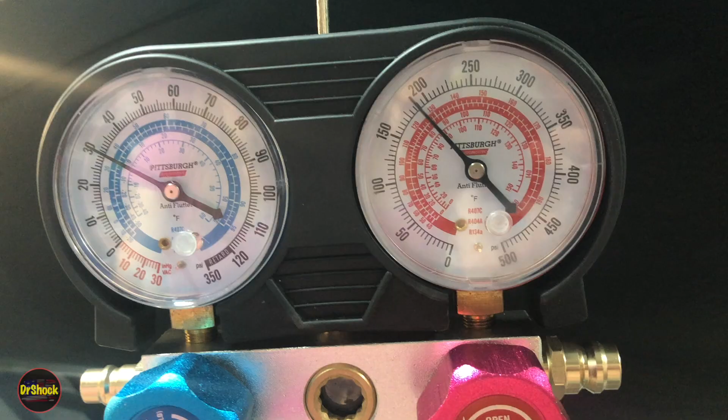We're going to pull the rest of this out, but first we're going to take a look at our gauges. Now we're down to 31, and looks like about 180-ish, 185. So we're going to let this continue to run and normalize, recheck our outside temperature and humidity, and see if we're within range now.

After sitting about 5 minutes to stabilize, low side looks like it's reading about 35 psi. High side looks like it's sitting around, I'm going to say 179 or 180 maybe. So much improved after this repair.

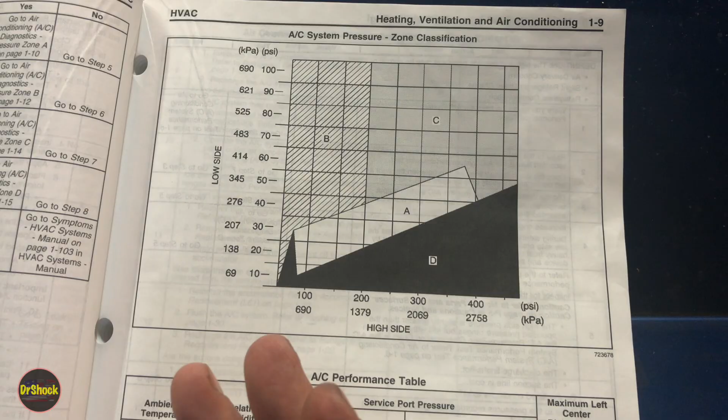We've got to go back to our performance table after the repair because it's been several hours between this job and another job that we were doing, and it's gotten cooler outside. So the current temperature right now is 85 degrees, and the humidity is now 69%.

If we come over here and look at the ambient temperature, we can see here's 85 degrees, this range, greater than 60%. We should be reading between 26 and 38 psi on the low, which it appears we are, and between 164 and 231 on the high, which we are. So we are now currently in the good zone.

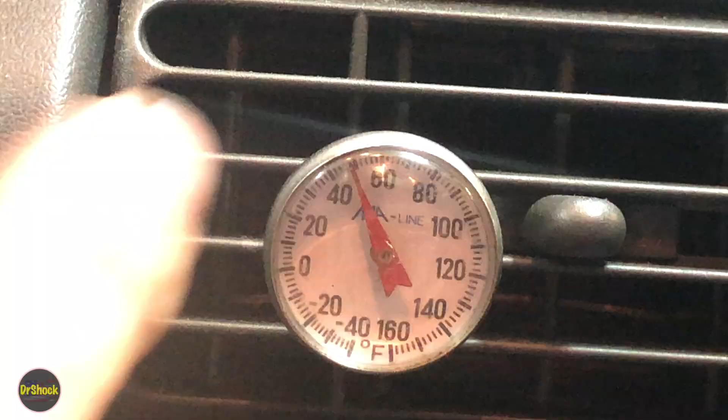Let's go inside and see what our thermometer reads. If we zoom in here, we can see we're reading about 49 degrees, I would say. So 60, that mark is probably 50. So 49 degrees, 85 degrees outside, 69% humidity. That's a huge improvement. So I'll call this a repair.

We're going to go ahead and evacuate the rest of the refrigerant that's in the high side, like I showed you earlier. So we'll use the manifold gauge to draw what's in the high side into the low side to capture what's in the lines, which is part of our 1.5 pound charge, and then we're done.